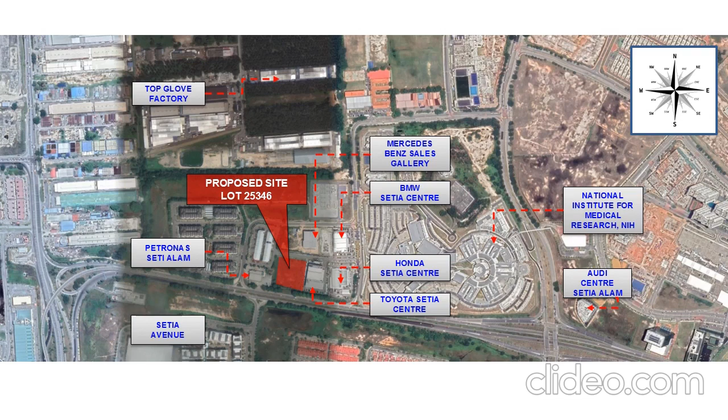The issue and potential of this site: first, natural ventilation depends on the design of the building, and second, to integrate optimum use of daylighting in the building implementation.

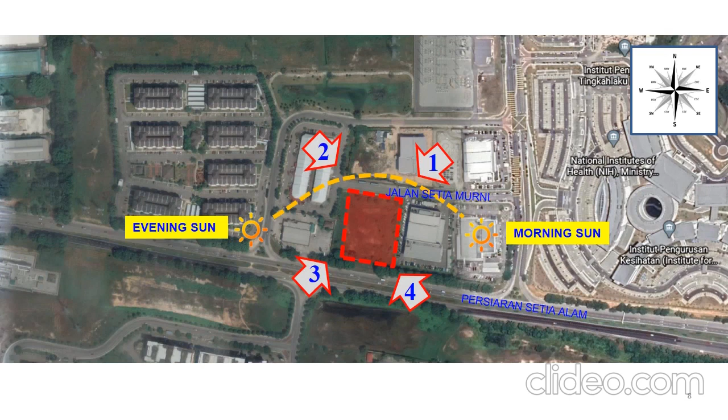The problem statement is user health and well-being in the working environment, and the optimum level of daylighting will affect mood, productivity, health, and social relationship.

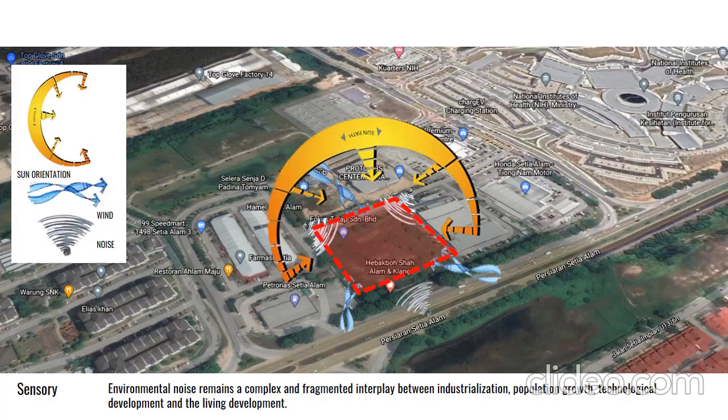The hypothesis is that creating an R&D center will affect daylighting for visual comfort in design and natural ventilation. The aim for this project is to analyze the effect of daylighting for visual comfort and the application of natural daylighting ventilation on the R&D center.

The neighboring buildings on this site are: first, Petronas Setia Alam; second, Toyota Setia Centre; third, Honda Setia Centre; fourth, Mercedes-Benz Gallery; and last, BMW Setia Centre.

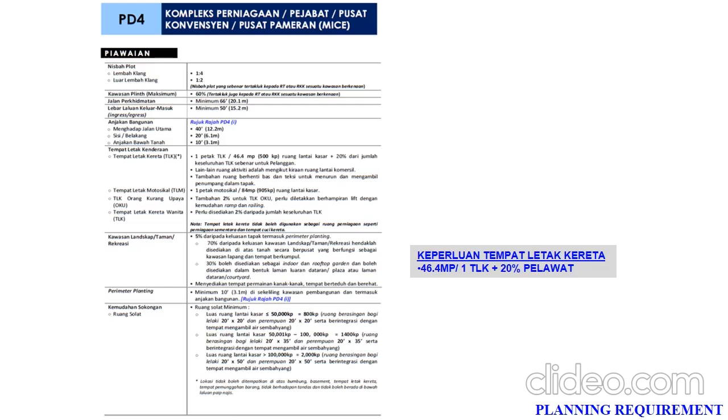My first case study is Menara PJH Putrajaya, a study on daylight for visual comfort. Second case study is Singapore National Library by T.R. Hamzah and Yeang.

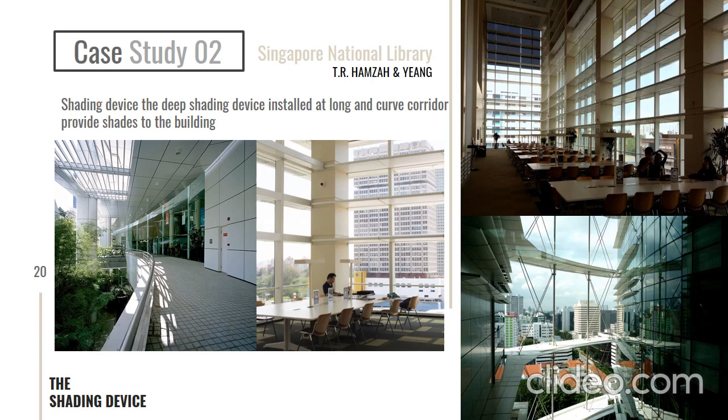This is more focusing on the shading device itself. The horizontal shading device extends to the interior of the National Library Singapore, becoming light shelves in library spaces such as the reading room in the building.

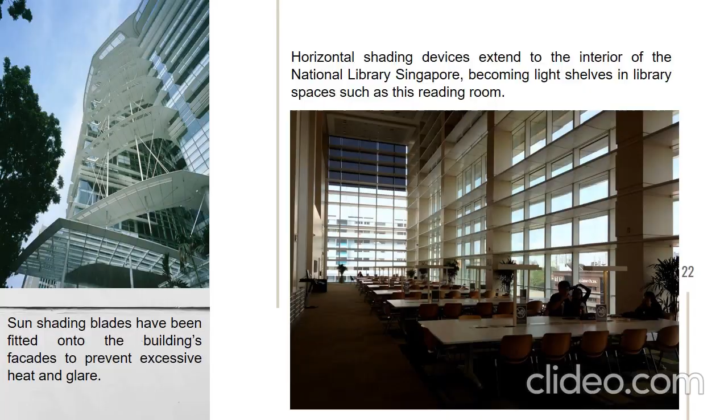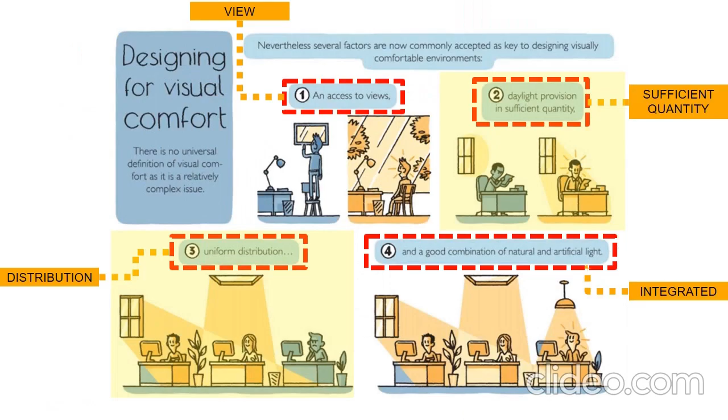For the architectural design strategies: first is building form and orientation, second is shading device and facade design, and third is opening location and the sizes of the window.

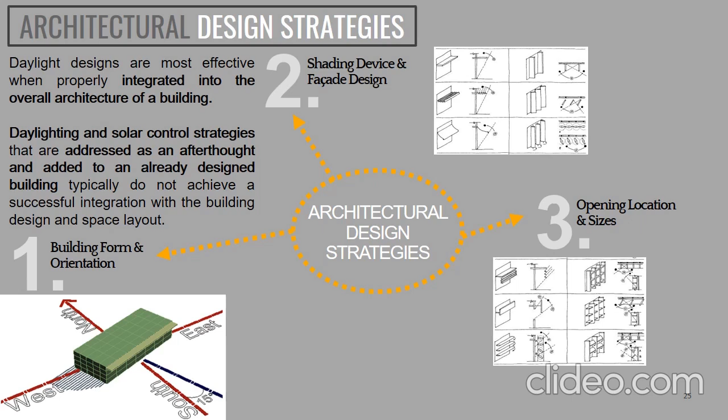First is building orientation. The best orientation is east-west rather than north-south, as this captures the maximum daylight. Orientation 1 is the worst, and the best is orientation 3.

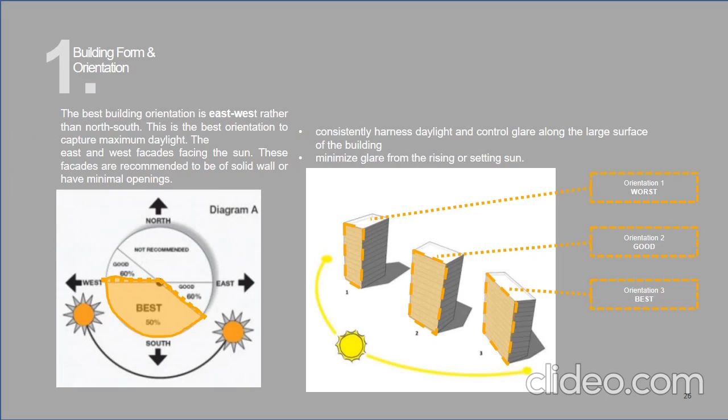My intention is to select an appropriate building footprint to allow the building to maximize the use of daylight available in the area. The second strategy is shading device and facade design.

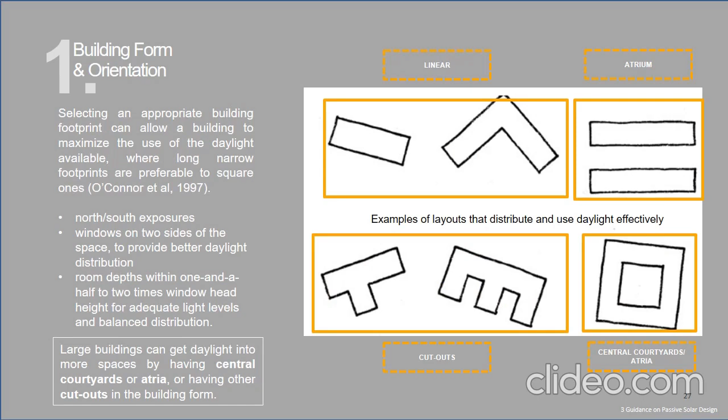The best shading solution should complement the daylighting design, and the shading system must incorporate well into the building form and plan. For my building program, first is styling and technology development, consisting of rapid prototyping modeling, second is

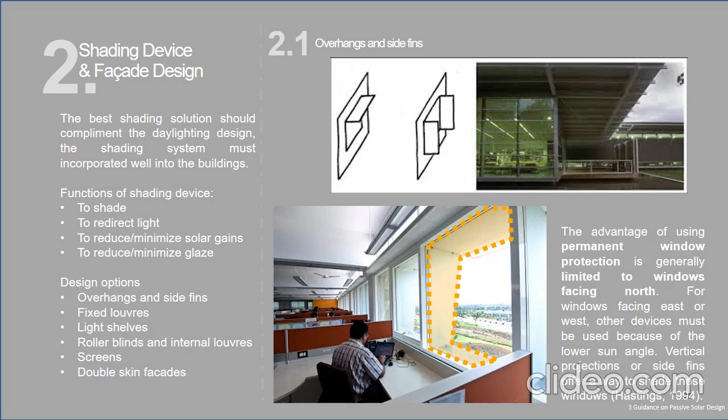clay modeling, third is design lab, and the last is R&D room. For facilities and workspace, first is conference room, second is focus room, third is showroom, and last is outdoor visual room.

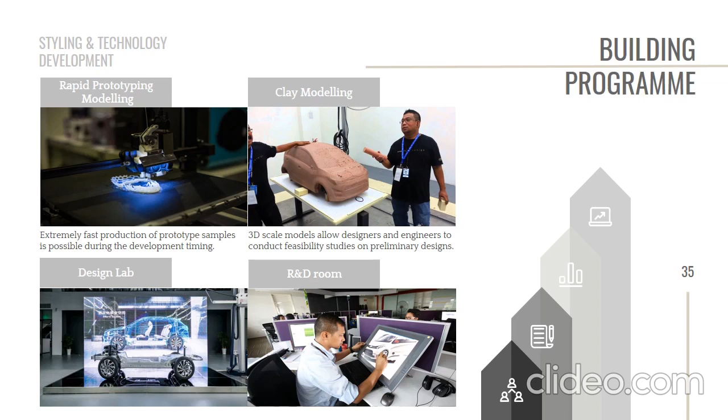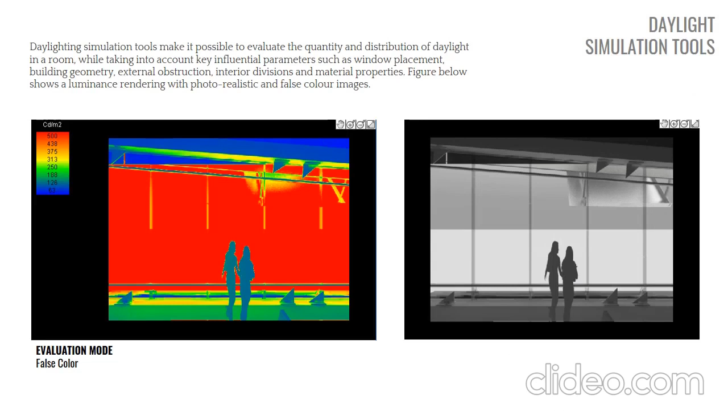For the daylight simulation tools, daylighting simulation tools make it possible to evaluate the quantity and distribution of daylight in the room, taking into account key parameters such as window placement, building geometry, external obstruction, interior division, and material properties. Velux Daylight Visualizer is a professional and validated simulation tool for analysis of the daylight condition in

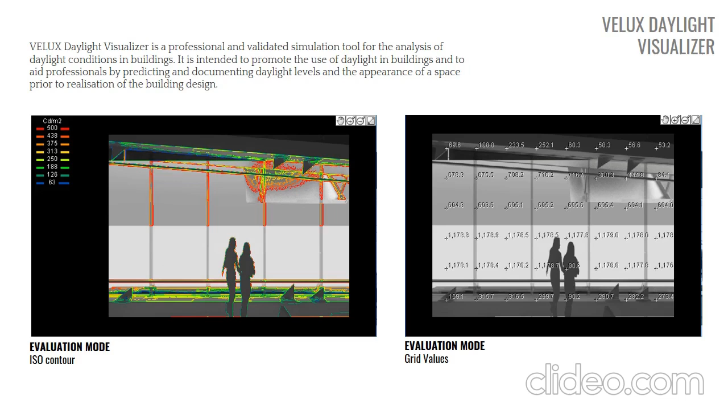the building. It is intended to promote the use of daylight in the building and to aid professionals by predicting and documenting daylight level and the appearance of a space prior to realization of the building design itself.

I'm also focusing on the rainwater harvesting tank system, which we'll go through later. For my development data, the land area is 1.3 acres, around

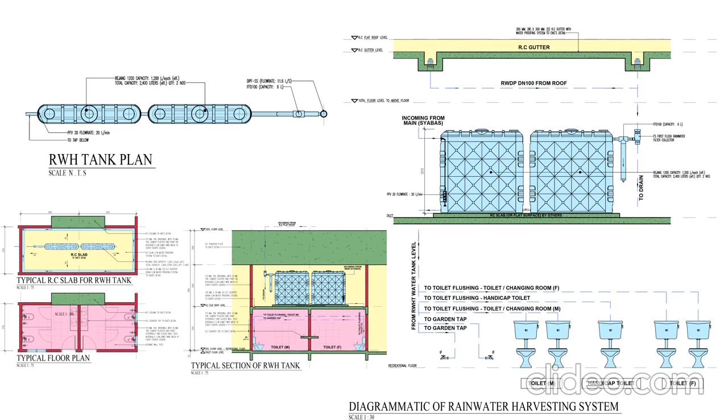56,628 square feet. The permissible ratio is 1 to 2, and the allowable GFA is 113,256 square feet.

Total car park required for this project is 248, and provided is 241. Motorcycle required is 140, and provided is 147.

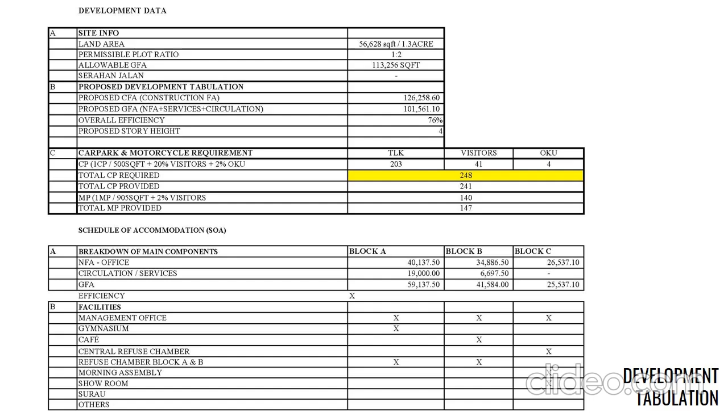Basically, my design strategy is to cut the main building program into 3 different blocks for 3 different usages, first, to maximize the visual communication.

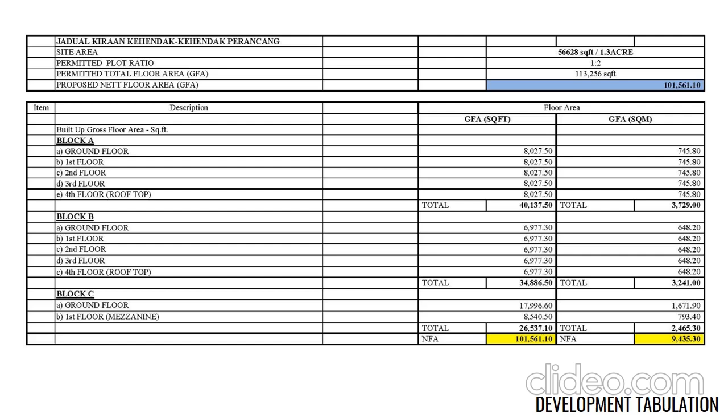The second is to capture the maximum sunlight and daylight in the building. The third is to create an eco-friendly walkway and passage for the visitors and employees. The last is to create a courtyard and pocket landscape for the building itself.

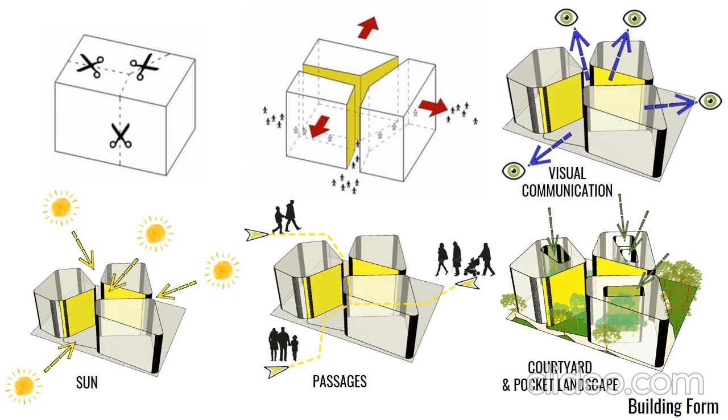For Block A, it is the research and development block, the second is styling and design lab block, and the last is the showroom.

The proposed design for this R&D center: the idea is to promote Proton brand through event and learning. Second is to tackle people flows due to the commercial zone, a people-oriented area. This is an economic growth area.

The third is to provide a friendly pedestrian ambience. The fourth is curvy design to maximize the view, natural daylight, and ventilation. The last is to always try to express movement in the design.

This is really related to Proton's strive to move forward. The proposed design consists of 4 drop-offs and a 6.1 meter Bomba access road.

This is the site plan for the proposed project, located at Persiaran Setia Alam and Jalan Setia Murni.

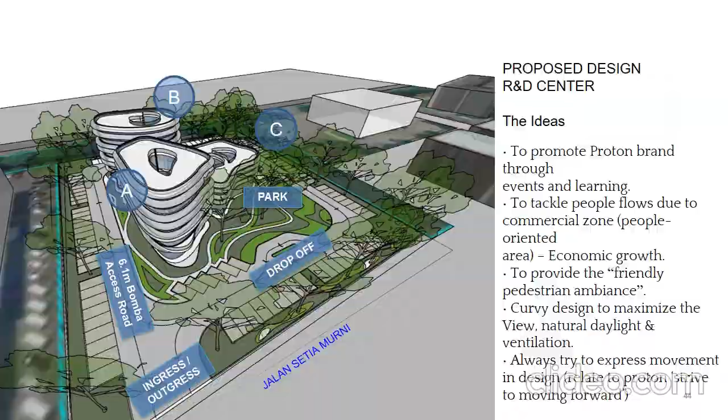This is the ground floor plan, consisting of Block A: meeting room, design studio, design lab and lounge; Block B: cafe, services, M&B and M&E; and Block C: showroom.

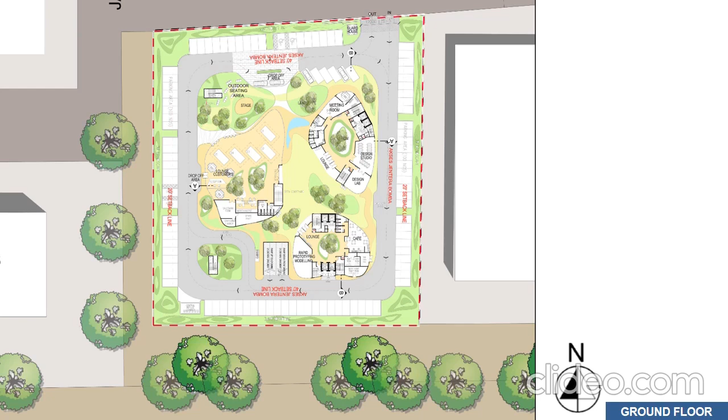For Block A, second floor consists of multi-purpose room, staff office, creative room and meeting room. Block B consists of audio visual room, open office and staff office. Same goes for the third floor.

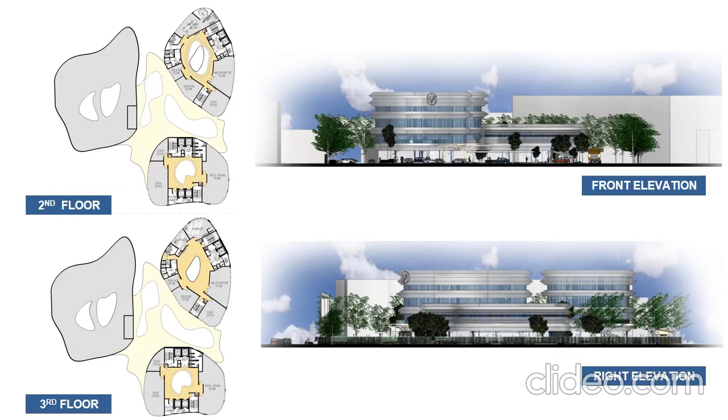Basically, the rainwater harvesting tank is to serve the ground floor garden and toilet flushing for WC.

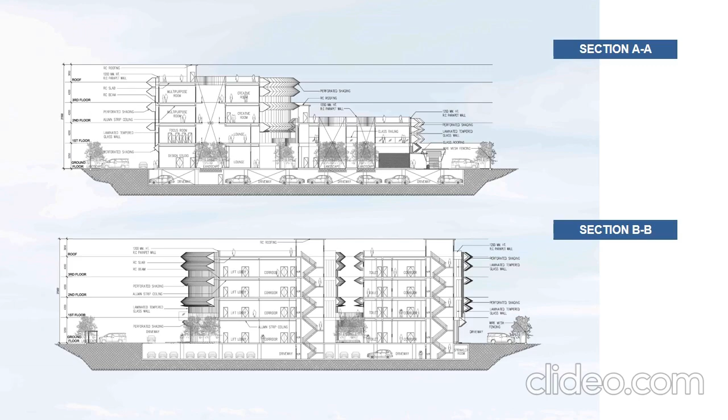The shading device used for this project is a perforated panel with a linear actuator and curved light for night, and the glass is a frame-fixed glass panel, 8mm clear tempered glass.